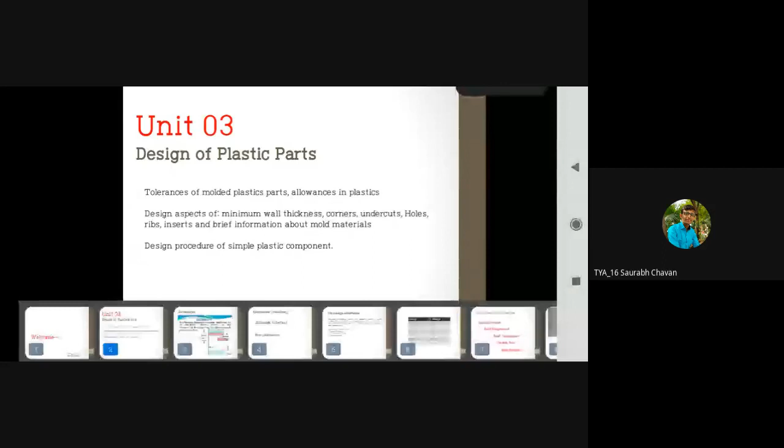So that was the basic fundamental behind the joining process, right? Then we started with the design of plastic parts, and from that we completed first tolerance. Then we went for allowances, right? While dealing with tolerance and allowances,

I told you one basic major difference between tolerance and allowance, right? Tolerance is because of deficiency. Tolerance is because of limitation. Limitations with respect to a skilled worker, limitations with respect to machine, limitations with respect to material, limitations with respect to manufacturing process. Whenever we have these kinds of elements, 100% efficiency is not possible. No worker can manufacture a 100% efficient, exact, accurate part.

There are going to be some variations, and to compensate that variation, we have given tolerances. No manufacturing process is 100% efficient. There are going to be some variations. To compensate that variation, in the sense variation in the dimension, to manage that dimension, we have given the tolerances.

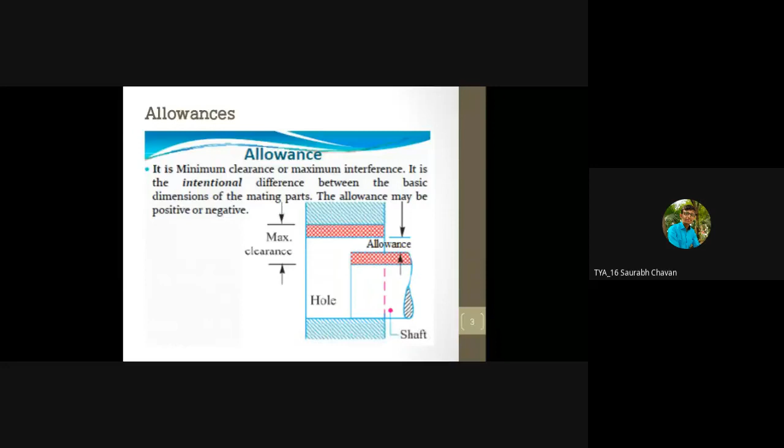So understand the basic difference. Tolerance is because of limitation with man, material, machine - these elements, manufacturing processes. Allowance is not because of limitation. Allowance is intentionally given, intentionally given to adjust the fits. So allowance is an intentional difference between basic dimensions, and tolerance is because of limitation, and we have seen various kinds of allowances.

Shrinkage allowance, which was a major one, because of the shrinkage of the parts, and in that also in depth we discussed the different kinds of shrinkage: liquid shrinkage, solidification shrinkage, and solid shrinkage. Liquid shrinkage means when it is completely in a liquid state, that time the shrinkage will happen - that is liquid shrinkage. Solidification shrinkage means, in case of solidification shrinkage, liquid has started converting into solid. So there are going to be two phases.

Just a minute. Who is there?

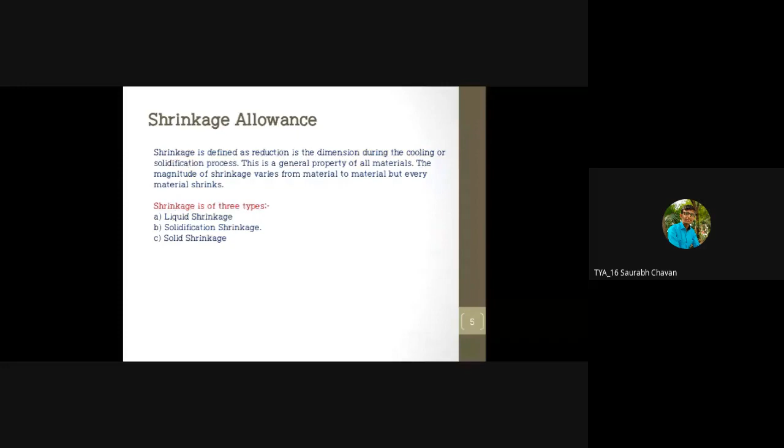So in liquid shrinkage, only one phase, liquid phase. In solidification shrinkage, two phases, liquid plus solid. In solid shrinkage, there will be only one phase, that is solid. So that's how the shrinkage will happen. Shrinkage will happen in three stages: entirely liquid, purely solid, and liquid plus solid. To compensate that, we have a shrinkage allowance.

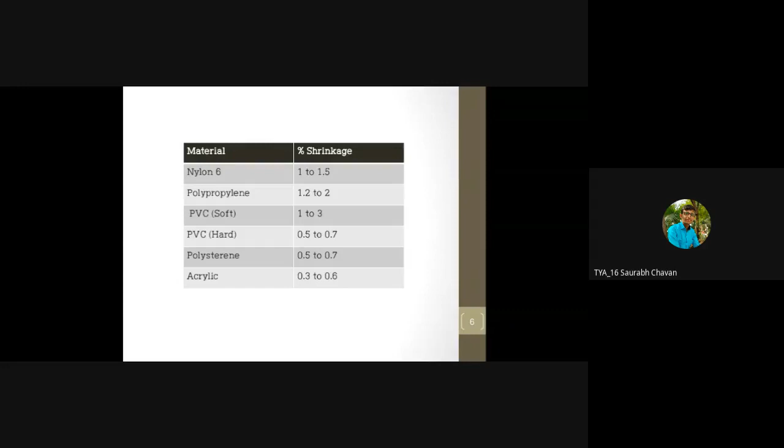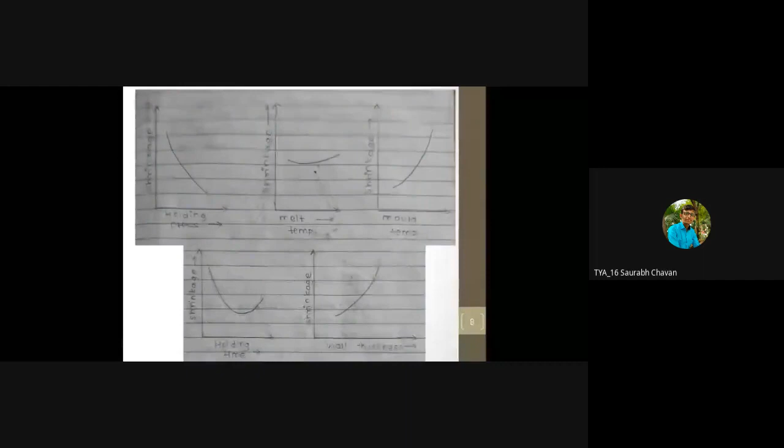And as per this material, it varies, because depending on the material, the shrinkage will vary. It depends on the structure of the material. Then we have seen the parameters for shrinkage. Shrinkage depends on holding pressure, melting temperature, mold temperature, holding time, and obviously on wall thickness. We have shown how the shrinkage varies with the different parameters.

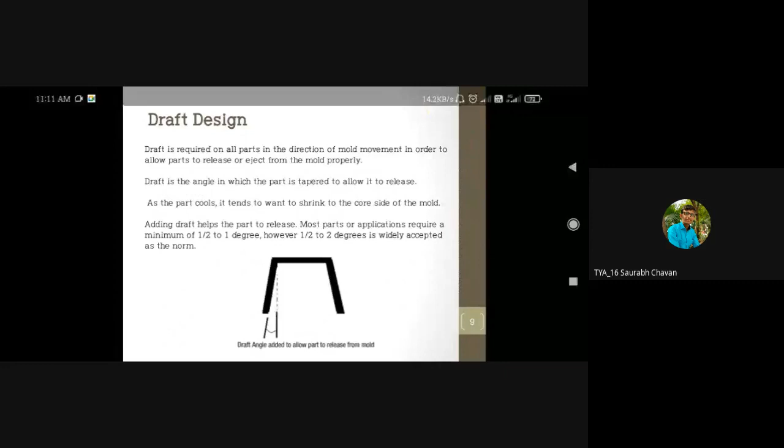And then we started with - is there, okay - then we started with designing. Now in the last lecture, we started with this draft design. Now basically, if you see the picture carefully, don't read the sentences that I have given, don't read the description, just see the figure which is given at the bottom.

Now if you see, it is a kind of mold. Now if you look at the mold, you will see that whatever part you are going to get from this mold is not a tapered part, is not an inclined part. Our requirement is that it should be a square part, square or rectangular - I mean a plain surface, not an inclined surface. Now if you check this mold, these two side walls, right side wall and left side wall, are showing inclined.

It is showing inclined. For the time being, just think that it is not inclined, it is a plane - there is no angular variation. It is a plane, simply like a square or rectangular, right? And you want the same size part, a rectangular shape or square shape.

Now what is going to happen - when you pour the liquid, then it will cool down, it will settle down, it will become hard, it will solidify. When you try to remove it from the mold, what will happen then? See, if you check the surface to surface contact, there is a huge surface contact from the left side, from the right side, from the bottom side, from the top side also it is going to be there.

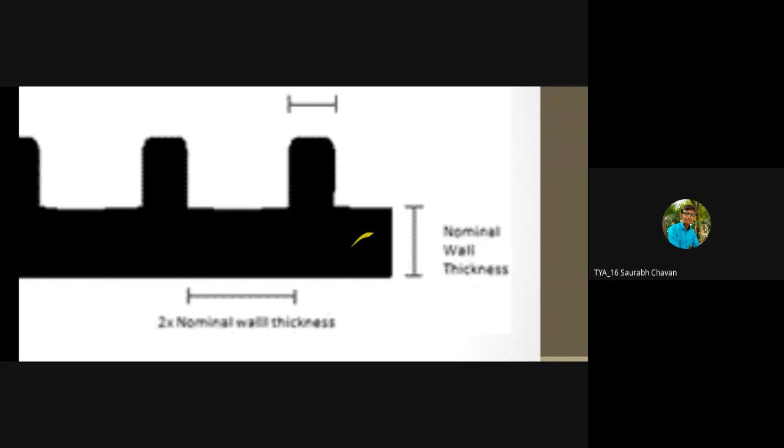See this nominal wall thickness, shown vertically here. Thickness of rib should be maximum up to 60 to 80% of nominal wall thickness. This kind of question is generally asked in the MCQ. Rib thickness is preferred 60 to 80% of the wall thickness, and even while designing and calculating, you will have to take these numbers into consideration.

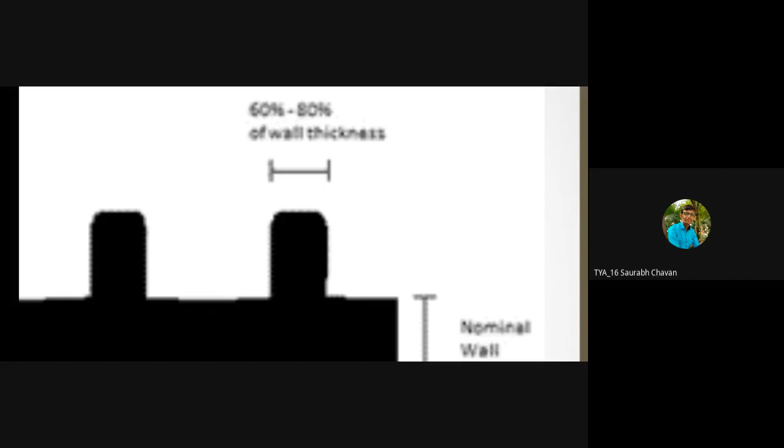Whatever you are going to add on the surface requires material. If you prefer more thickness of the rib, it will add extra material on the surface, increase the weight of the component, and increase the stresses on the component. So keep it maximum 60 to 80% of nominal wall thickness.

Very important, fifth statement: adding more ribs adds more strength or stiffness to a part. It is better to add more ribs than make larger or thicker ribs. If you are having a 10 millimeter diameter cylindrical rib, rather than that you can have 2 millimeter diameter ribs, about 5 ribs. So to summarize, rather than having a thick rib, go for thin ribs with more numbers.

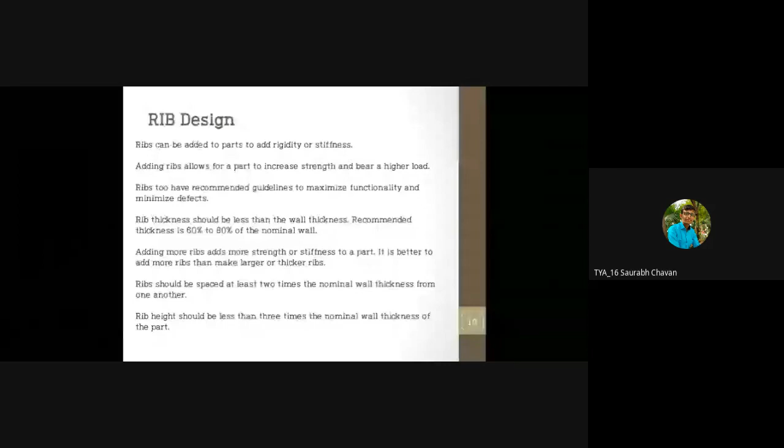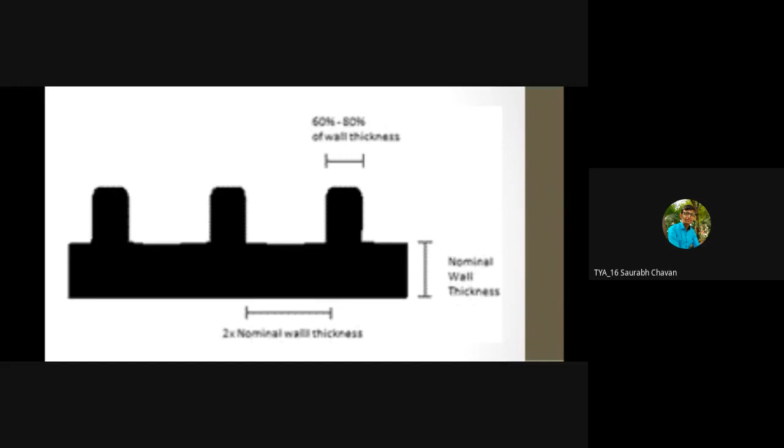Sixth statement required for designing purpose: ribs should be spaced at least 2 times the nominal wall thickness. The distance between two ribs should be at least double the wall thickness. So two parameters: thickness of rib should be 60 to 80% of wall thickness, and distance between two ribs should be 2 times the wall thickness. Keep these in mind as they're required for designing the component.

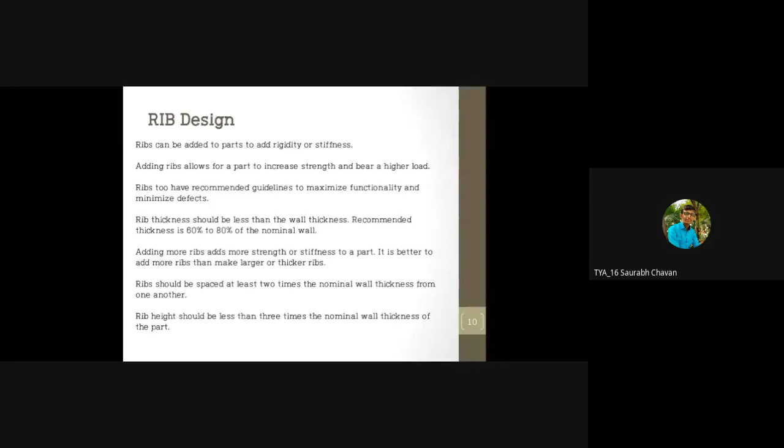Last one: rib height should be less than 3 times the nominal wall thickness of the part. So the maximum height you can consider is 3 times the nominal wall thickness.

Distance minimum 2 times the wall thickness, height maximum 3 times the wall thickness, it should be less than 3 times the wall thickness. Okay, three parameters: size of rib 60 to 80% of wall thickness, distance between rib 2 times, height of rib maximum 3 times. So distance 2 times, height maximum 3 times, and thickness 60 to 80% of wall thickness.

That's how ribs work. The purpose of rib is to provide rigidity and stiffness to the plastic component. I'm again repeating, ribs are not designed in the final component, and ribs are not actually part of the design also, neither part of design nor part of the final component. This is only the extra thing which is provided to get the proper rigidity and stiffness, only with the design aspect, not with the component aspect.

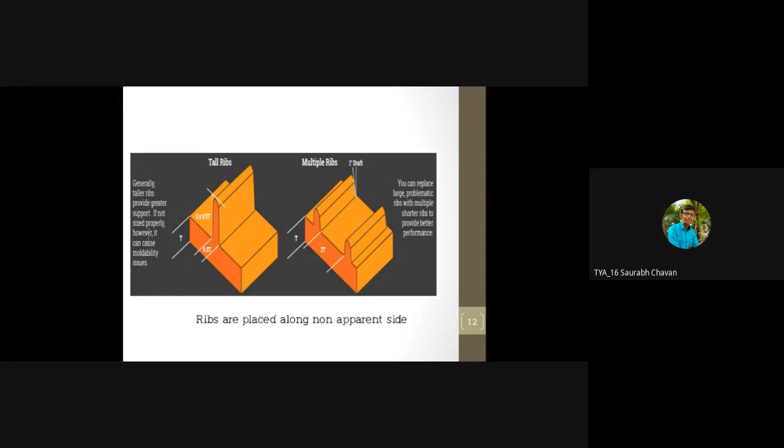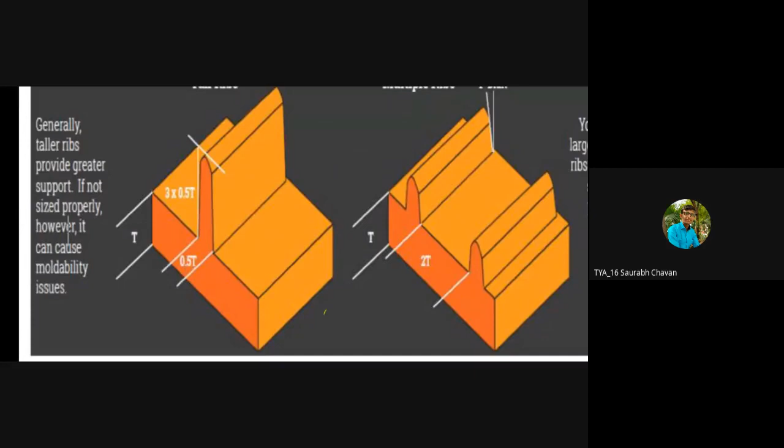Here it is given: rather than having one tall rib, you can go for multiple ribs. Thickness of the rib is 60 to 80% of wall thickness, distance between them is 2 into t. It is shown here - thickness of the rib they have given as 0.5t, 0.5t, 0.5t. So I told you up to maximum 60 to 80%, right? And the distance is 2 times the wall thickness. That's how the ribs are required to provide the stiffness or rigidity.

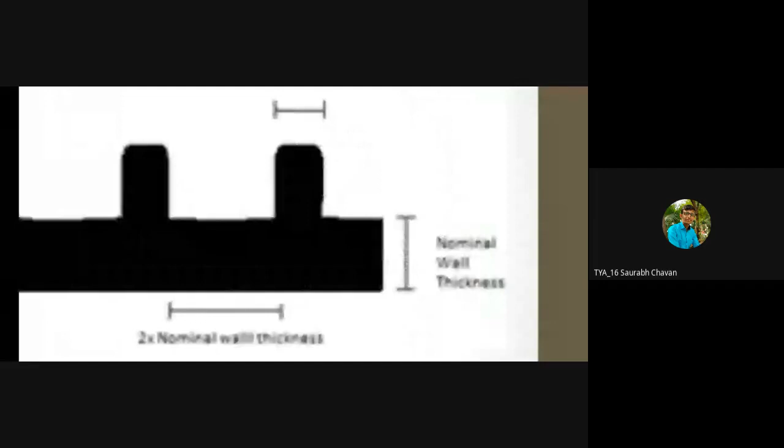The most important part is designing of the wall thickness. Parameters that are considered for designing of the wall thickness - now wall thickness means what? Let's see, I have the drawing. In this picture you will understand. This rectangular part is nothing but the wall of the component. Wall of component in the sense, the surface of the component.

Now see a simple thing. If you check any kind of plastic products, take the example of toys, take the example of components of the computer, laptop, mobile. Just take the example of mobile case, mobile cover which is made from plastic. Have you seen the thickness? Very less. It should only perform the required function, that is the only aim. If you go for more wall thickness, it will consume more material, increase the weight of the component, increase the cost of the component, increase the time required to manufacture. So wall thickness will be kept as less as possible. Only keep in mind, this should not be so much less that there should not be proper strength in that wall.

By maintaining the strength parameter, wall thickness is kept as less as possible. Typically, the wall thickness range is 0.5 millimeter to 4 millimeter, depending on the component. Minimum 0.5 millimeter, maximum 4 millimeter - this is the range of wall thickness. A basic design guideline is to keep wall thickness as thin as possible, and one more thing, as thin as and as uniform as possible. Two things - as thin as and as uniform as.

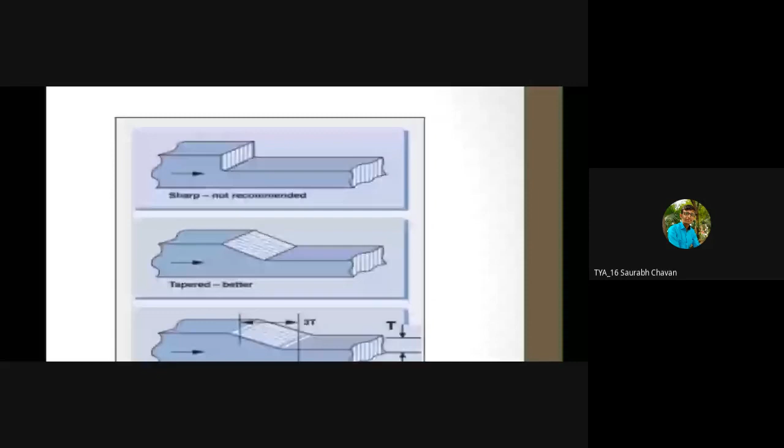Why as uniform as, we'll see in the next slide. Two things: the thickness of the wall of the plastic component should be less, as thin as possible and as uniform as possible. And if there is a variation in the thickness of the wall, it should be a gradual variation. We come to this slide, you will understand now. Check the first figure. Now if you check it, there is an instant variation in the wall thickness. At the start, just at one side, wall thickness is too large, and at the middle, if you check it, it is instantly changed and reduced. So two to three things will happen here.

Whenever there is an instant change in the wall thickness, there is a problem with the cooling rate first - I will explain that also. Second thing, this instant change in wall thickness will generate sharp corners. If you see in the first figure, there is a continuous sharp corner. Instant change in wall thickness will mostly generate sharp corner, and sharp corner has a problem of stress concentration. Now stress concentration I will not explain because you have studied it properly in machine design.

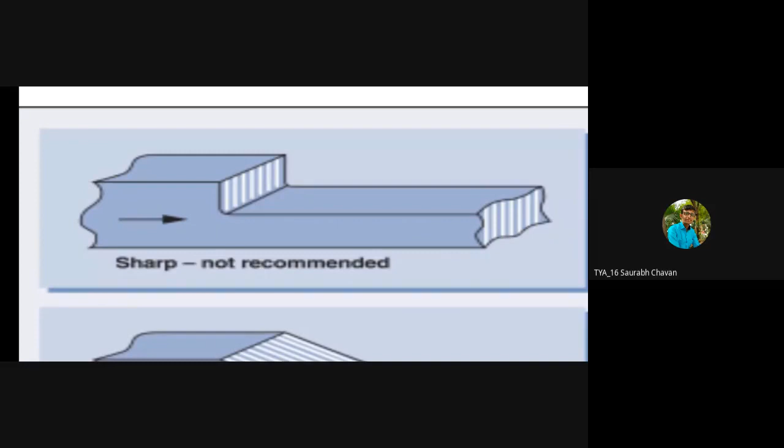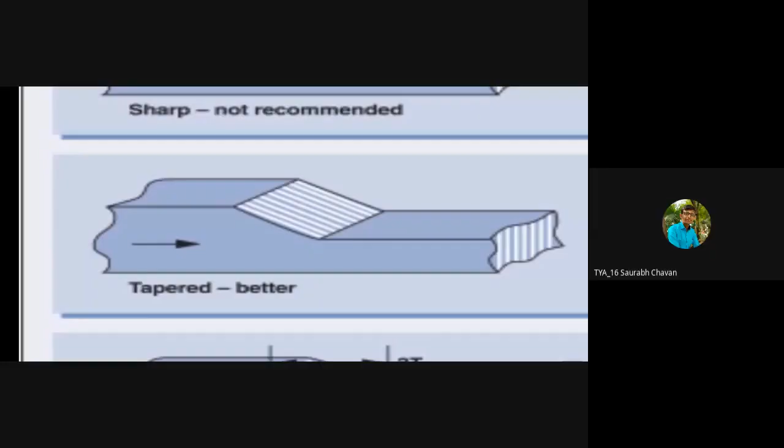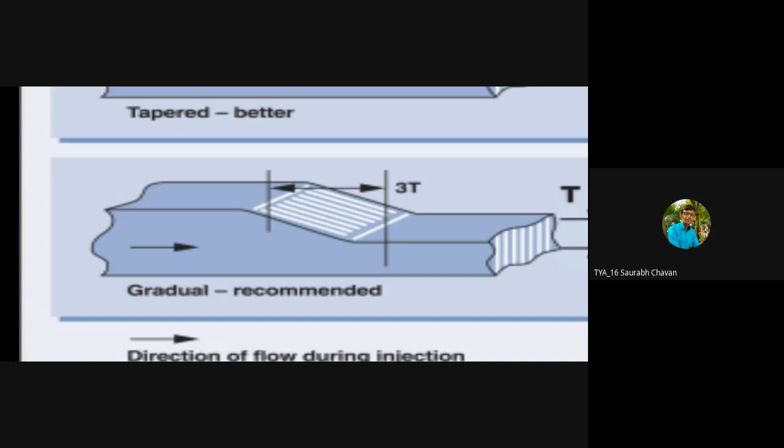So sharp corners generally face issues - sharp corners are avoided. You get the example of your chairs, tables, anything - sharp corners are avoided. The basic reason is stress concentration. One more reason is variation in the cooling rate. So sharp corners are not recommended, instant change in wall thickness is not recommended. Rather, this is recommended - tapered, slowly or gradual variation. This is better, this is best - a very slow variation in the wall thickness. What will happen? Its cooling rate will not be affected because of this slow variation. If there is an instant variation, it is going to have a very instant change in the cooling rate, which will cause the distortion.

Now check the three figures at one go.

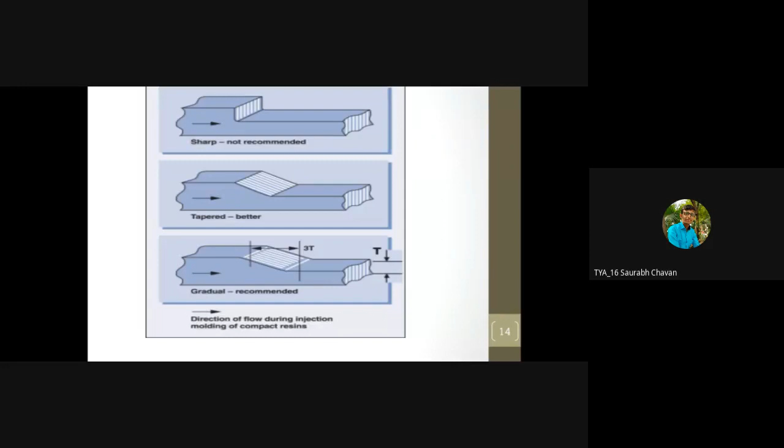The first one, very instant change in the wall thickness. Second one, tapered, and third one, very gradual variation. Now here are the influences.

This type of question is generally asked in the exam: influence of wall thickness, what is the effect because of this change in wall thickness? First thing, from the third point I showed.

Mold filling. So what will happen? If there is a uniform wall thickness, the mold cavity will also be uniform, and when liquid molten plastic comes into the mold cavity, it will uniformly occupy all space because of the uniformity. So voids will not be there, empty spaces will not be there. It will uniformly occupy all the space, and there will be a proper surface.

Now, if there is an instant change in the wall thickness, as shown in the last slide, what is going to happen? First, mold design is going to get complicated, and molten material will not occupy all the spaces. So there is a possibility of having empty spaces, voids.

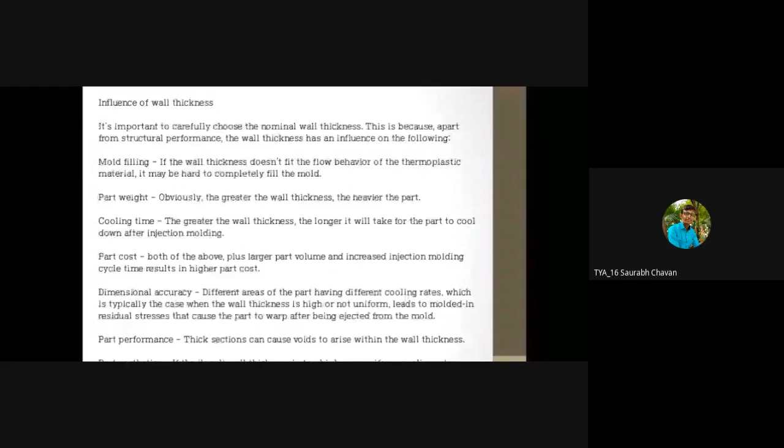Second thing, part weight. If you increase the wall thickness unnecessarily, up to some limit it is okay because we require strength in the wall. But after that, if you go on adding material in the wall, thinking that strength will be more - we know the parameter of optimum, so it should always be preferred to have optimum wall thickness, not lesser nor higher.

If you increase the wall thickness unnecessarily, you need extra material which is not required, and it will increase the weight of the component. Material requirement is more, weight will be more, cost will be more. Ultimately it will affect the cost.

Third thing, cooling time. Greater wall thickness means more material required and more cooling rate effect. Now listen carefully - if wall thickness is more, it will act as a barrier for heat transfer, so cooling rate will decrease. It will take too much time to cool the molten material. That is the first issue.

Second issue - whenever there is a continuous change in wall thickness, somewhere 10 millimeter, somewhere 5 millimeter, somewhere 6 millimeter, what happens? The most important issue is that because of change in cooling rate - where there is 10mm wall thickness, different cooling rate; where there is 5mm, different cooling rate; where there is 6mm, different cooling rate. And this entire variation is on one surface, so you are getting three different cooling rates at three different locations. Different cooling rate or solidification rate means different density at different locations.

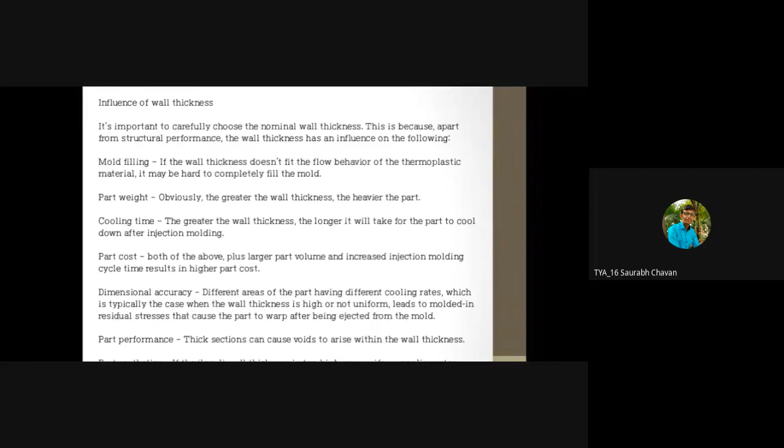Next is part performance. As told, thick sections can cause voids to arise within the wall thickness. If there is a thick wall thickness, cooling will not be proper, and there is a possibility of getting voids or empty spaces from which cracks originate, because at the openings there is a possibility of stress concentrations or residual stresses, which is the region for generating the crack.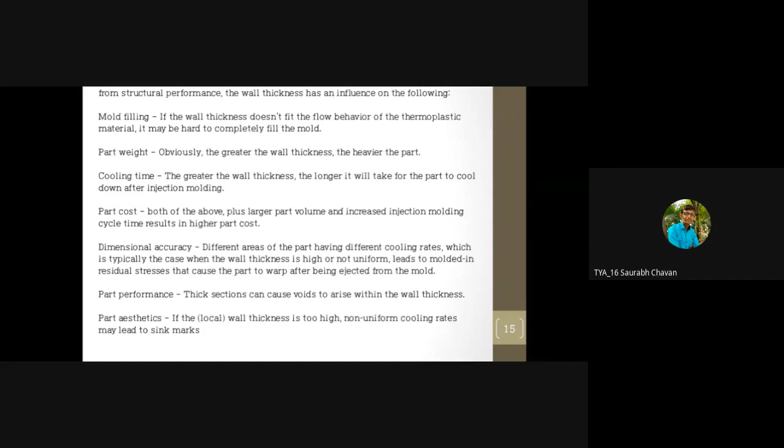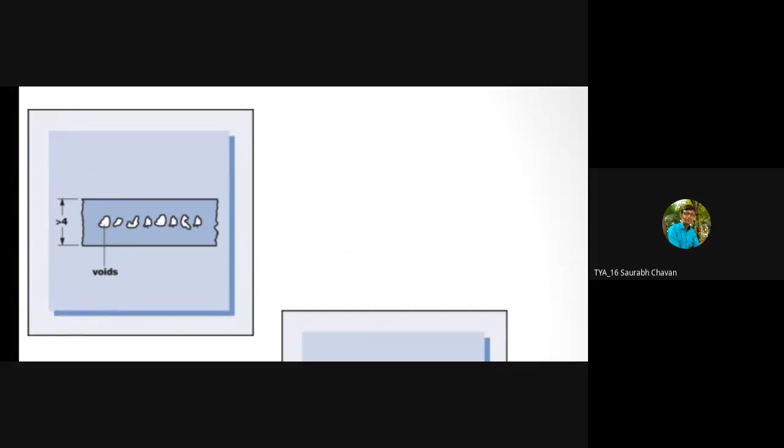And last is part aesthetics. Look here, the first figure, top one. When there is a large wall thickness, this kind of voids are possible, and this void will generate cracks. So more wall thickness means generation of voids.

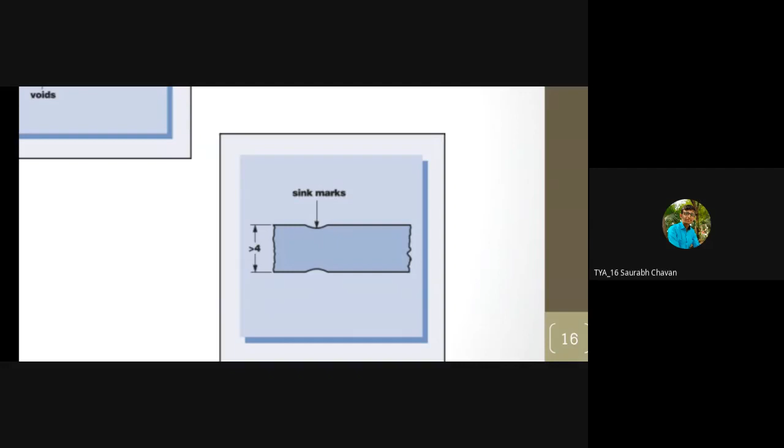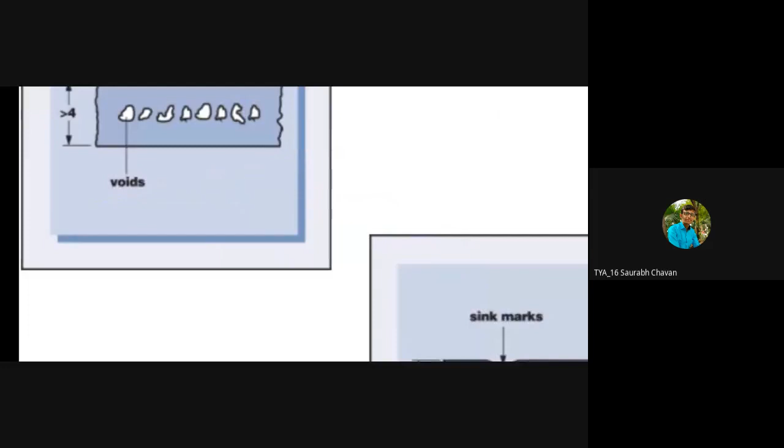And next is sink marks. This happens because of uneven solidification rate, uneven cooling rate, uneven wall thickness. I think I have not taken that figure, let it be. So two types of major issues for a larger wall thickness: first is void and second is sink marks. The sink marks are caused because of uneven cooling rate, which is because of uneven or non-uniform wall thickness.

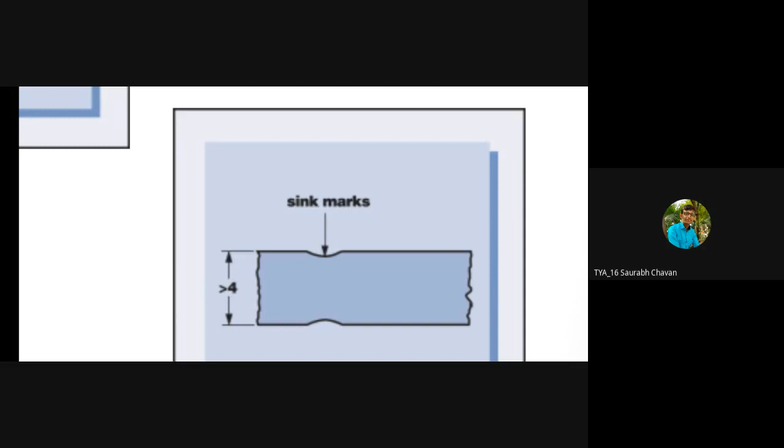So basically, if you see the summary, whenever there is a variation in wall thickness, these kinds of factors are going to cause issues with mold filling, part weight, cooling time, part cost, dimensional accuracy, part performance, and part aesthetics.

And the last one is design of corner. Very simple, just like wall thickness. Just check this figure, you will understand everything. Design of corner parts. If you check the first figure, exactly a rectangular shape.

Now, when is it possible to have these exact corners? Corner means there is a conjunction of two surfaces. A corner happens when there is a 90-degree conjunction of two surfaces. When two surfaces meet each other at 90 degrees, there is a corner. Wherever there is a corner, there is a possibility of stress concentration - that's the first issue.

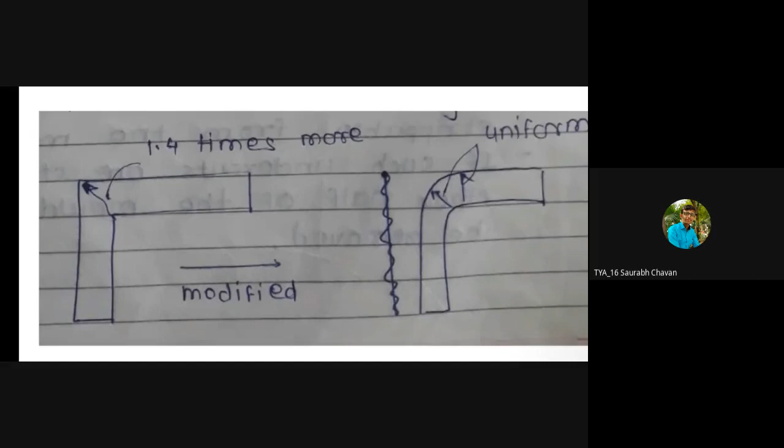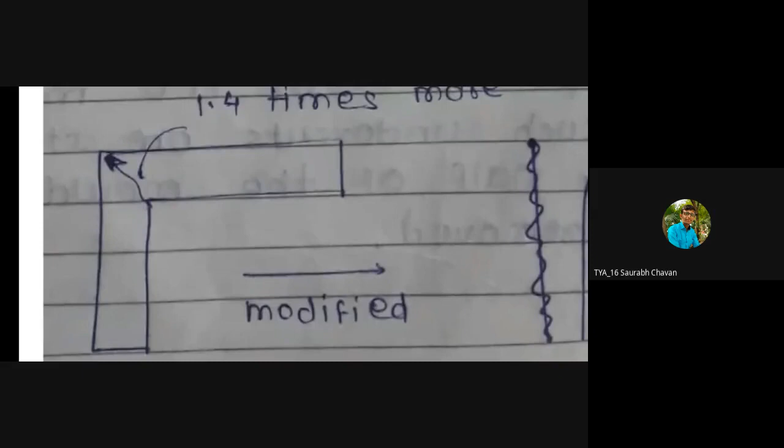Now in this figure, if you check the wall thickness at the corner, it is increased. The wall thickness at the top rib is different, at the bottom vertical rib different, but exactly at the corner diagonal, it is shown to be 1.5, 1.4 times more than the side walls. So more wall thickness there. A vertical rib has different wall thickness, at the corner different wall thickness, and the horizontal rib again different wall thickness. So different, uneven wall thickness will cause uneven solidification, uneven cooling rate, and again the same issues we have seen in the wall thickness case.

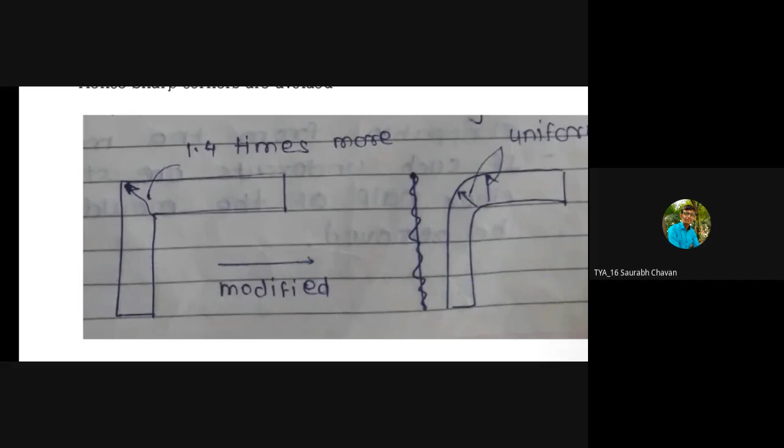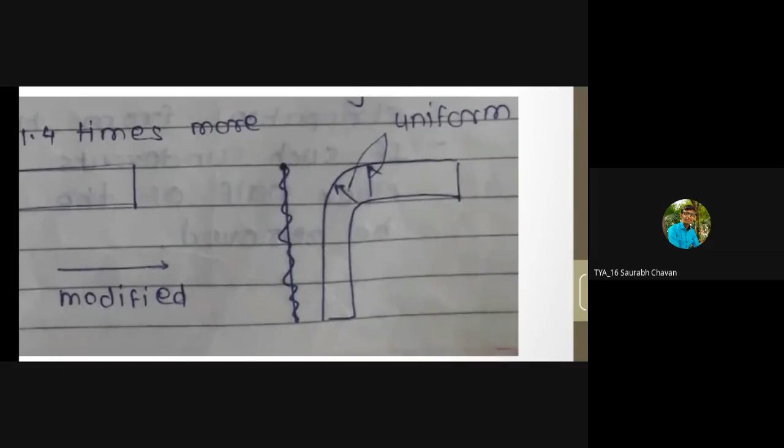So corners are avoided and uniformity is maintained like this - make it quite circular or oval type instead. Avoid the corner and make it this way, so the issue of stress concentration is minimized, and the issue of variation in cooling rate is also minimized. That's what design of corner means.

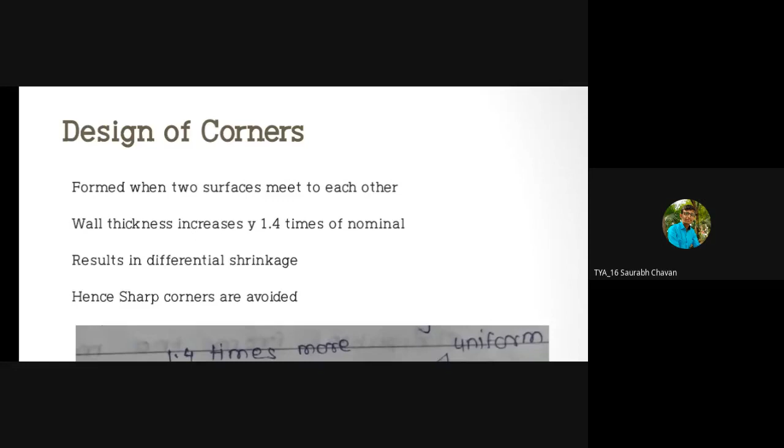Check the statements now: corners are formed when two surfaces meet each other. Wall thickness increases by 1.4 times the nominal, which results in differential shrinkage, as cooling rate and shrinkage will be different. Hence, sharp corners are avoided because of the increase in wall thickness at the corner. One more issue - check here.

Okay, problem of sink. Why is it happening? Look here.

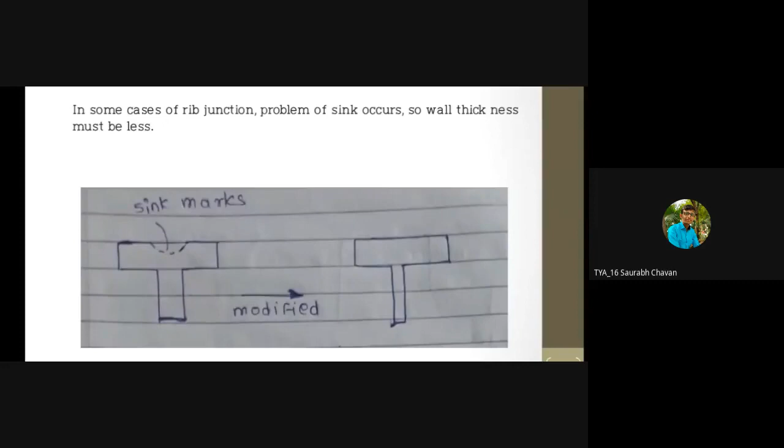If you provide this rib of more thickness, the rib shown at the bottom, when molten material is poured inside the mold cavity, because of this more thickness of rib, more solidification or more material will go inside this rib, it will occupy this rib space. Cooling across this horizontal rib and cooling across this vertical rib will be different. It has to compensate for the vertical rib also.

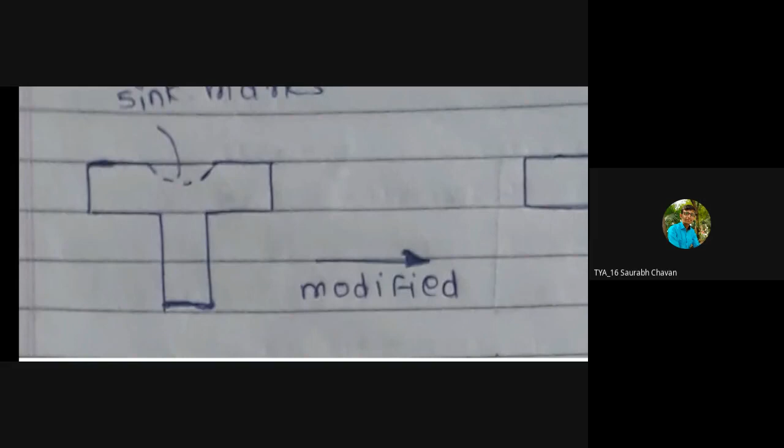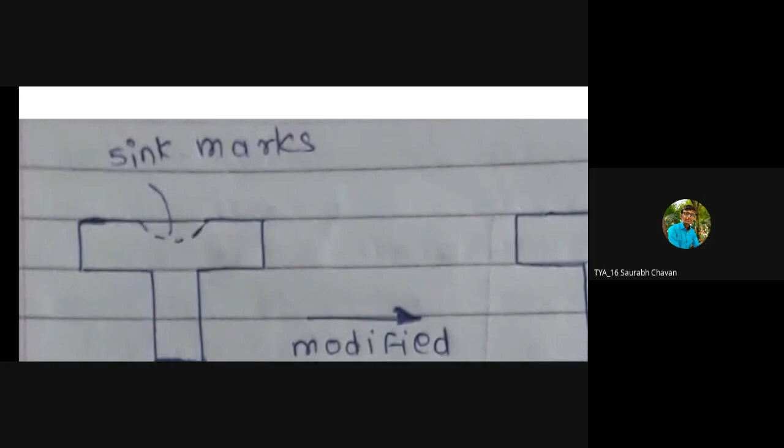So there is a possibility of getting this kind of sink, like a valley, a sloppy section. That is the possibility because of difference in shrinkage. It happens because of difference in shrinkage.

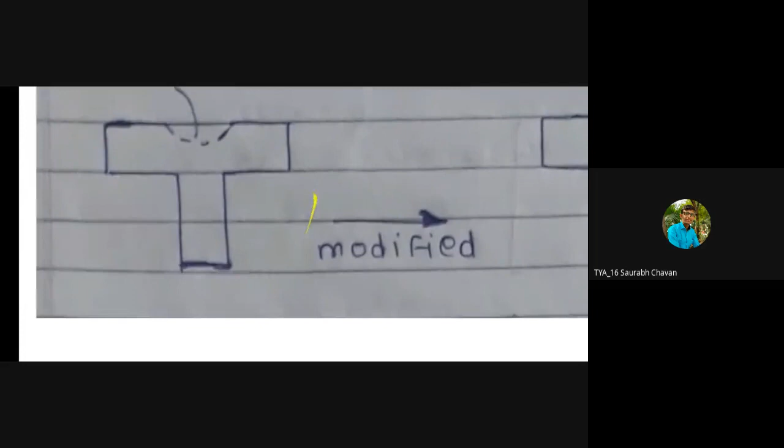Mostly whenever there is a uniform wall, uniform surface, uniform component, the sinking will not occur. But whenever there is an instant change in the component somewhere, this sinking is possible. What is preferred is less wall thickness, so that the shrinkage difference will be less. That is what is preferred.

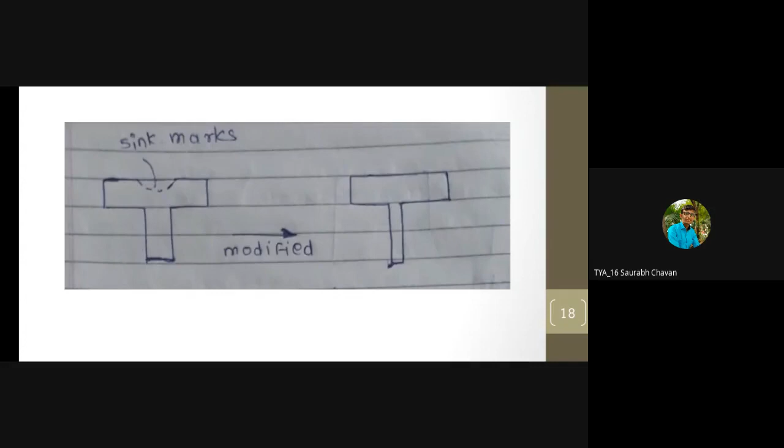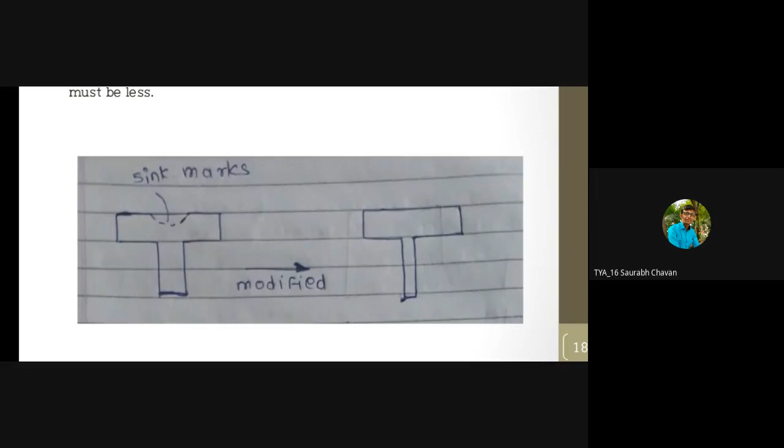Similar to what we discussed in case of rib design, less thick ribs are preferred. Rather than having one large size rib, prefer to have multiple ribs of small size. This is because of variation in solidification, which causes sink marks.

For design of corners, prefer to have this kind of shape rather than sharp corners, because sharp corners will result in differential shrinkage and residual or internal stresses.

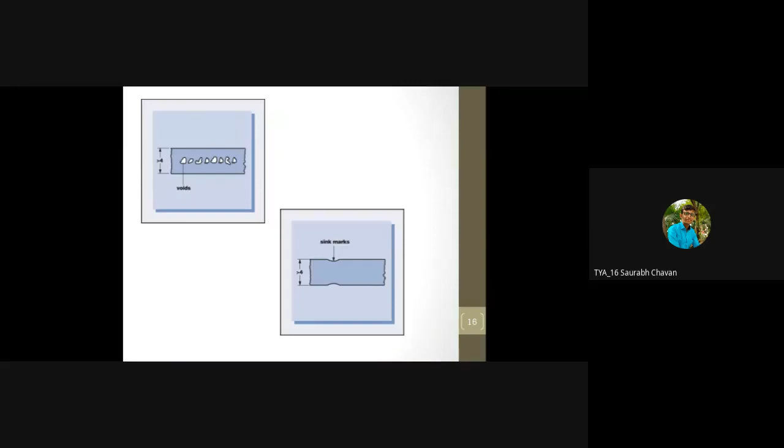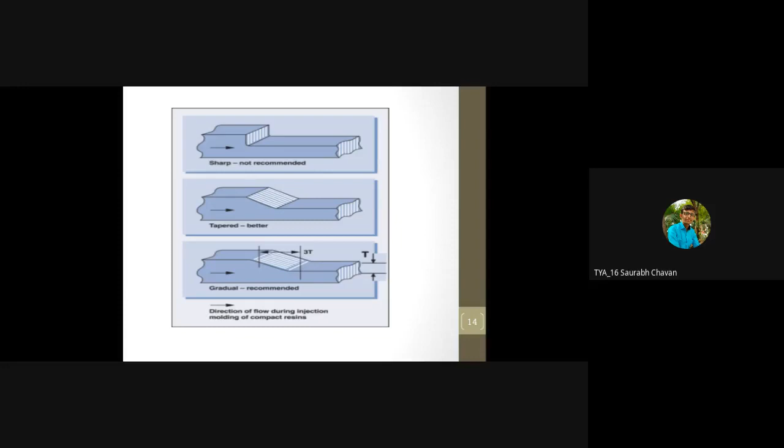In case of wall thickness, these are the problems: mold filling, part weight, cooling rate variation, part cost, dimensional accuracy. So prefer to have gradual variation in wall thickness if at all required, otherwise go for uniform wall thickness.

In case of ribs, while designing, prefer to have more number of ribs at 60 to 80% of wall thickness. Distance between ribs should be 2 times the wall thickness. Height of the ribs should be maximum three times the wall thickness. These are the design parameters.

For draft design, draft angle is hardly from 0.5 degree minimum to maximum 2 degree; if an option of 1 to 2 degree is available, you can prefer that also. The purpose is so that the part can be easily released from the mold. That is the sole purpose.

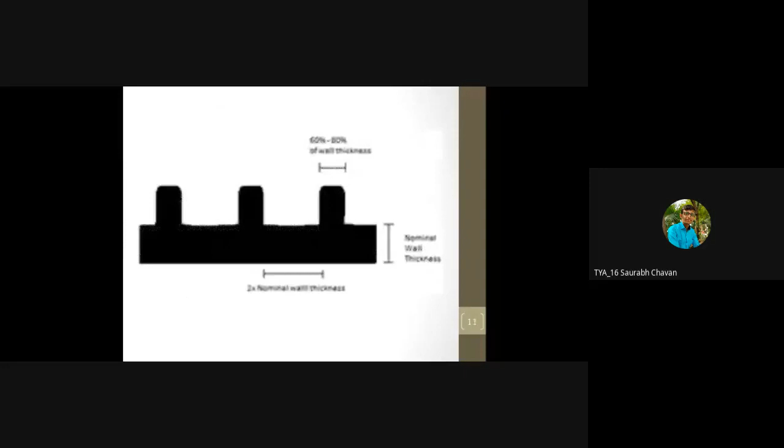So these are the parameters we wanted to study today: draft design, rib design, wall thickness consideration, and design of corners.

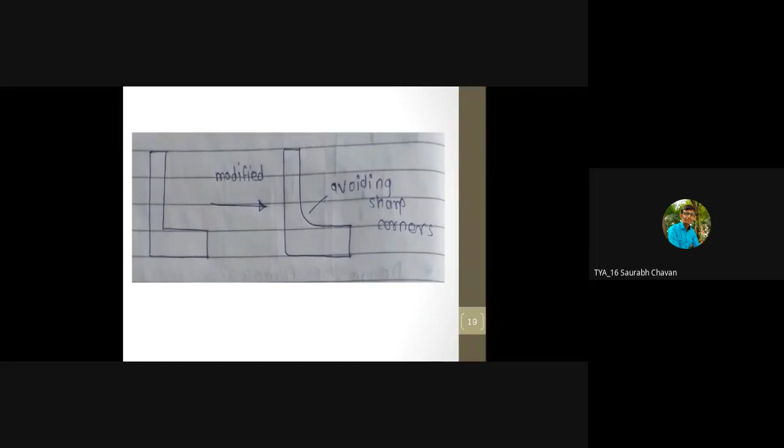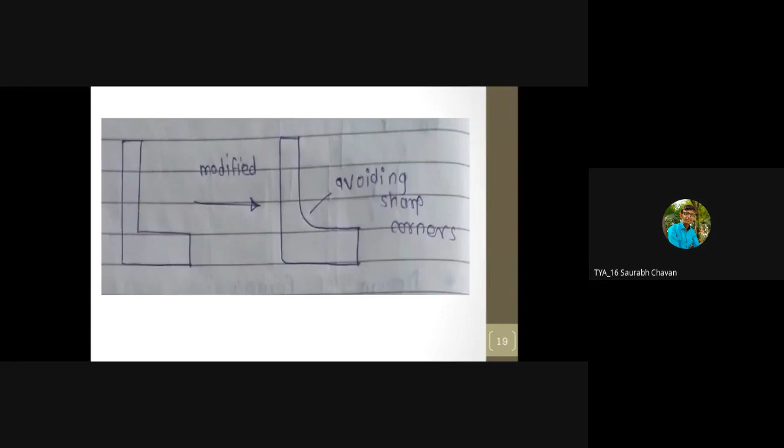Design of corners: here in this picture, if you see, there is more wall thickness at the corner. So rather than having it this way, avoid having sharp corners.

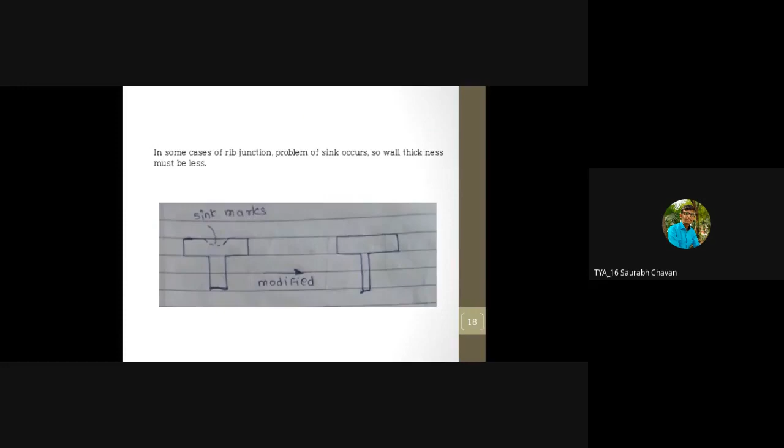In the next lecture, we'll go for the design of undercut. So that's it for today.

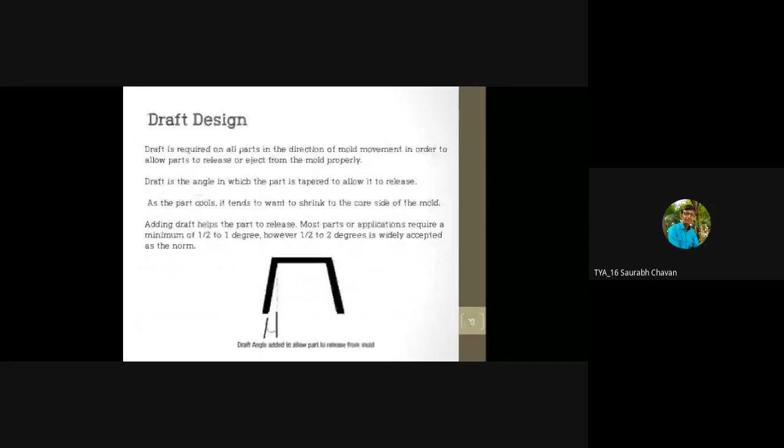So we have seen tolerances, we have gone for allowances, and in the design part we have gone for wall thickness, corners, and ribs. Now remaining is holes, insert, and the mold material. In the next lecture we'll go for inserts and holes and description about the mold material, and then we'll go for the design procedure.